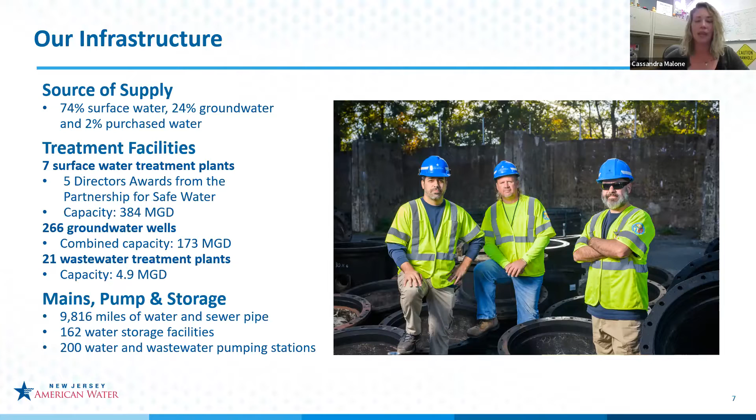Communities in the following counties that we serve. So close to home - I would assume that a large number of participants on this call are our customers. So really grateful for the opportunity to interface with you on this.

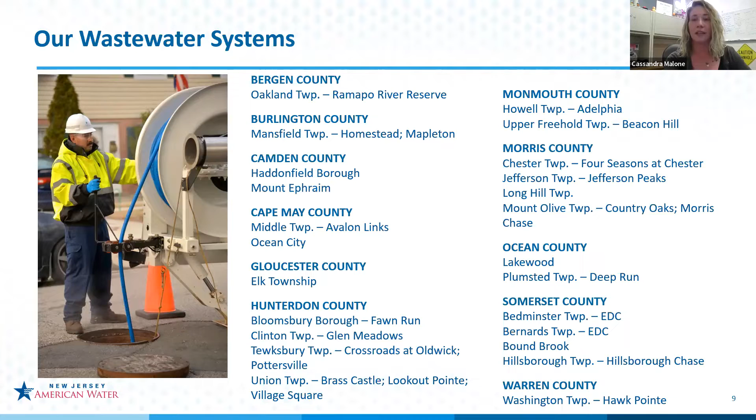Wastewater systems scattered across the state. We're expanding our footprint in wastewater, and you'll see the need for this as we get into the slides and get the idea of the state of the infrastructure in this country.

Drinking water's got a C- across the country, and this isn't specific to New Jersey American Water. This is across the country, every single utility. So we need some investment.

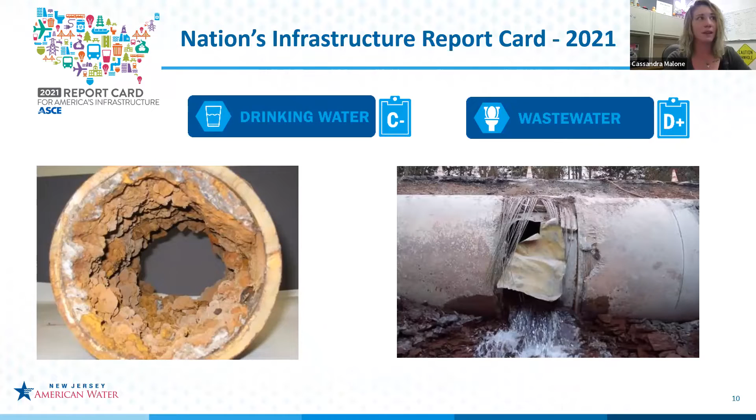Clearly we've improved in the past, but there's still a lot of work to do. Regulations like the Water Quality Accountability Act hold water purveyors to certain capital investments and improvements in the system. A lot of the way our current infrastructure state is due to lack of investment in those things. That money gets spent elsewhere and we haven't been keeping up. So a lot of our pipes in the ground are failing and we just can't see it.

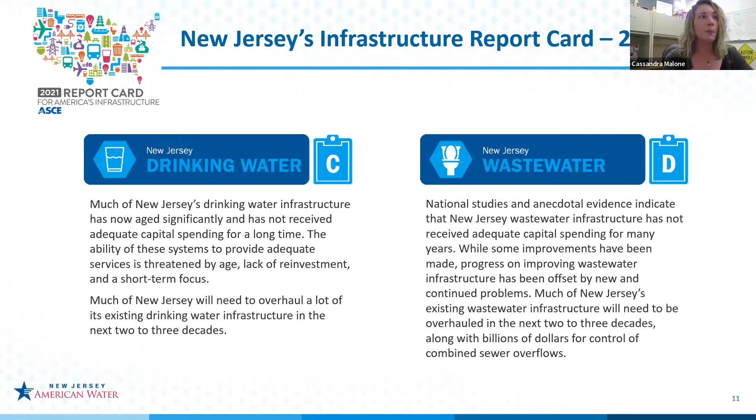We're making investments throughout the state, and what our cost model does is spread the cost out, so not one single community is overburdened when they need significant capital investment to ensure safe drinking water deliverability.

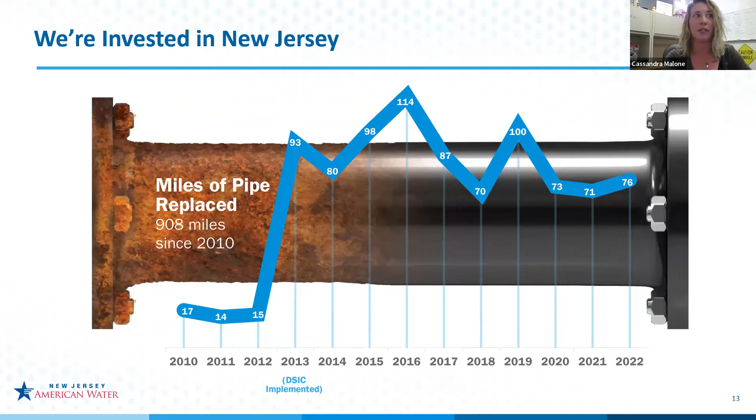That's how many miles of pipes we've replaced since 2010, which is pretty extraordinary. When something's buried, an asset is buried, it's very difficult to get at. So you can kind of appreciate the scope of replacing that much linear feet of pipe over such a small period of time.

We also say we're customer obsessed. We want you to be happy. We want our customers to feel safe when they open that tap to drink water, shower, or cook. So we have 24/7 customer service available to report emergencies. If you're out of water, or experiencing discolored water, you can call our center and we'll get you connected to the right people. We also have an emergency alert notification system.

If you're not signed up for this, I highly recommend you do so. This will give you real-time text messages, emails, and phone calls when there's something going on, like hydrant flushing in our system, which we do routinely on an annual basis. You'd receive a notification of that, and any other work going on in your area that could potentially disrupt the clean water coming to your homes. Particularly sediments can get stirred up when we do work in our distribution system.

We also have a new mobile-friendly website that you can access, and it's more self-serve at this point. I highly recommend everyone check that out and put your information in there. We're also committed to paperless billing. A lot of paper waste gets generated otherwise, so I'm glad our company recognizes the need to go paperless.

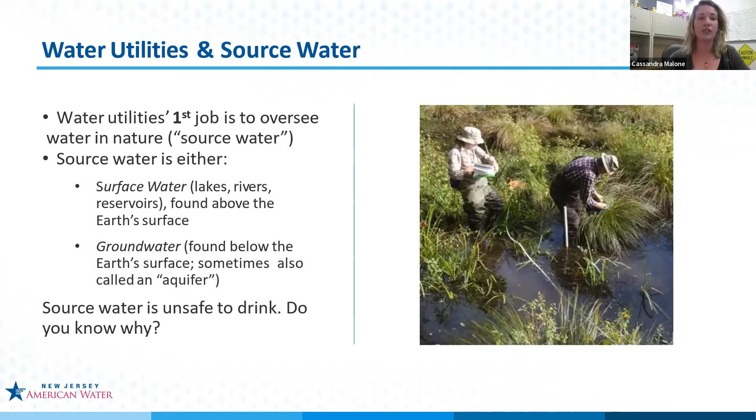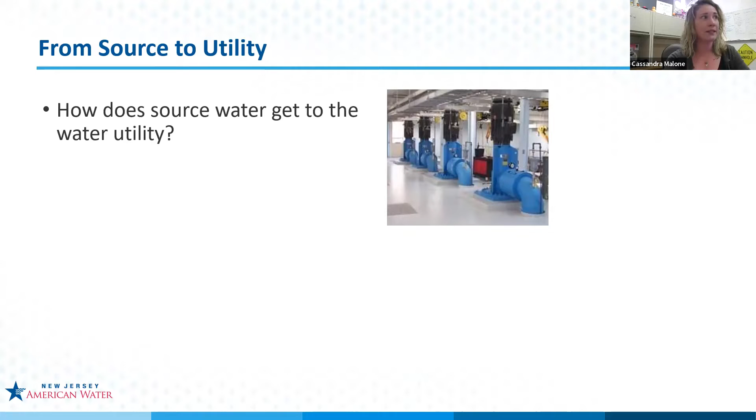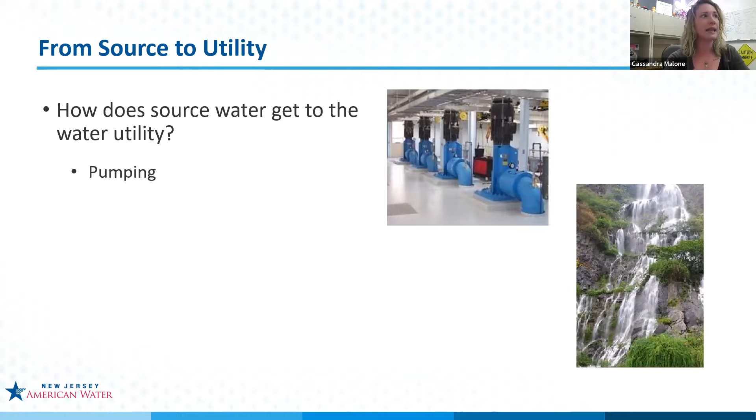Our second job is to treat and to clean the water. Our source water is cleaned. We remove sediments, organic matter, all those colloidal materials that make our source water kind of unpalatable to look at - we take all of that out through our process. So when it becomes treated, it's considered potable and safe to drink. That's our little industry jargon for drinking water: potable water.

So utilities can clean and disinfect water through a variety of processes, and we'll get into that a little bit later. Our third and final job is to deliver that water to your tap.

So water moves through a series of pipes, they're interconnected. We have booster stations - you've probably driven by one every single day and not even realized it. They kind of look like little shacks that are fenced in, but typically they're very large pumps that we need to move water up hills into higher pressure areas and get the water to where it needs to go. Our infrastructure handles about 40 billion gallons per day, which is pretty amazing.

Our final and third job, oh, well, that's that. I realize these are really lovely animations we have here.

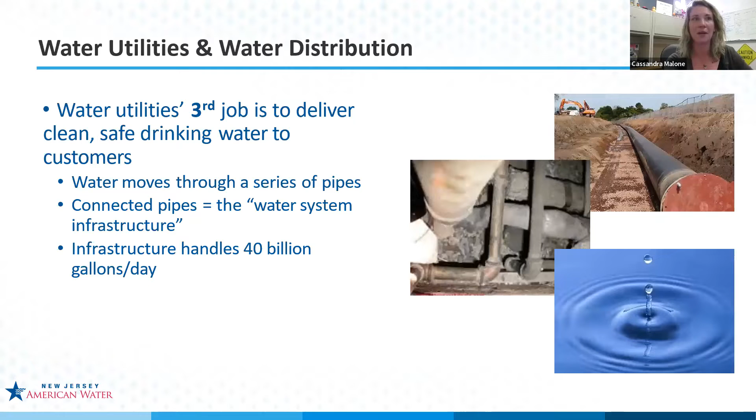Run-of-the-river plants and surface water in particular are very susceptible to pathogenic organism presence, so we have to treat for that. It's also more vulnerable to things like spills or contamination events. There are things we can't control, like transportation issues. I'm sure everyone's heard about the awful environmental disaster in Ohio a few weeks ago.

So we are aware of all of our railroad crossings, and we work very closely with our local OEMs and the New Jersey Water Supply Authority for information about any spills that occur, so that we can take action before it gets to our intakes.

Surface water is a little bit different than groundwater to treat. Groundwater typically holds more contamination, like volatile organic compounds and PFAS - polyfluorinated compounds, which are forever chemicals, and they exist in our groundwater sources in a number of places. So there are different types of contamination or parameters that we might see depending on the source.

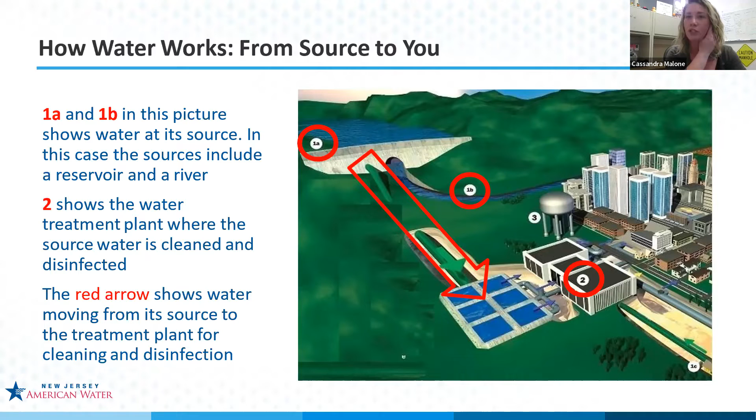Our Raritan Millstone plant also has the ability to add fluoride. That's an additive recommended by the American Dental Association, and basically once that goes in, you can't take it out. Hydrofluosilicic acid is not particularly safe to work with, and there are a lot of chemical storage requirements that come with this. We also have continuous online instrumentation to ensure that we're not overdosing on that particular chemical.

Once the water leaves the plant, it's pumped out into the distribution system using very high capacity pumps, in addition to those already in the distribution system. The water gets into your pipes and into the storage tanks, which basically act as a buffer for us, pressure-wise throughout the system, ensuring large quantities of water are available to meet system demand.

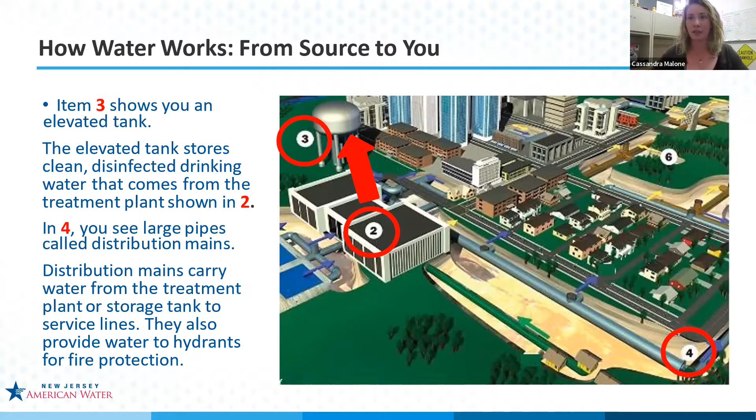You'll notice, especially with the hot, dry summer we had last year, that keeping up with system demand can be a concern of ours. So you might notice water use restrictions during summer months, because the idea is to keep water in the pipes for firefighting and sanitary reasons. That's a really important component, as well as the hydrants and fire protection our water provides.

Now we talked about distribution mains. There's also another component, the service line. This is the piece of pipe that connects the large distribution or transmission main to your house. The service line's job is to carry drinking water from the main into the plumbing of the building. Easy peasy - once it's installed, you just turn the faucet on and voila, you've got water.

There's an interesting part about ownership of service lines, and I bring this up because of the new lead service line replacement rules passed in New Jersey recently. The water system technically owns the water service up until the curb stop. From there, the customer has ownership of that service line. We're working with our communities to have customers identify their side of the service line materials, because if you've got lead or galvanized piping, we're going to want to replace that. I can't say it'll be tomorrow, but we need an accurate inventory to know where to target to meet the lead service line replacement rule requirements.

So there is a portal - if you go onto our website, you are able to self-identify. There's a lot of great information on how to identify your piping, particularly if it's lead. You'll notice it's got a dull gray color, and scratching it with a point or something is going to leave a mark. That's your indicator that it is lead.

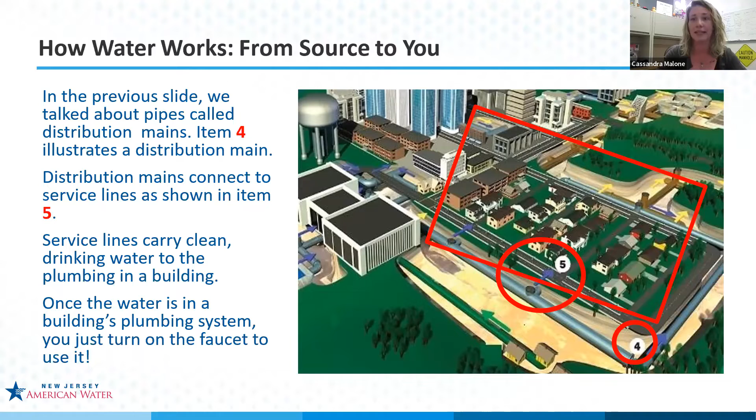I get this question a lot: is my water safe to drink? I can always say that our water meets primary drinking water standards. We test for a lot of different things. Coming back from my previous days at New Jersey American Water, when I used to work at a laboratory, we'd have people ask, can I just do a poison water test? There's no such thing - there are parameters we look at for potability and drinkability, and that's what we go with.

Every treatment process is designed to maintain compliance with these primary and secondary drinking water parameters. Primary standards all have a maximum contaminant level - this is the maximum permissible level before it has an effect on human health. It's enforced for municipal systems.

When I say municipal systems, I mean community water systems like ours. They're also enforced for something called non-transient, non-community water systems. For instance, if there's a school on its own well or an office building with its own well, they're treated just about the same as we are, maybe a little less stringent. But just so you know, they are being tested, and the government didn't forget about them.

Our primary standards include very specific chemicals and pesticides, over 80 different contaminants, including lead, copper, arsenic, nitrate, nitrites, cadmium, chromium, nickel. There's all sorts of things out there that we can test for. A big thing we also look at is volatile organic compounds - this is a scan of a number of different compounds that are carcinogenic, things like tetrachloroethylene and so on and so forth. And obviously PFAS, we look at that as well.